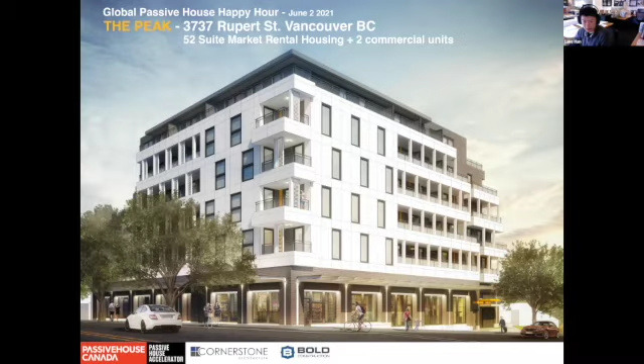So the Peak is a 6-story Passive House mixed-use building with retail and restaurant use on the first story and 52 rental dwelling units on the upper stories under the secure market rental policy. The site is located at the intersection between Rupert Street and East 22nd Avenue.

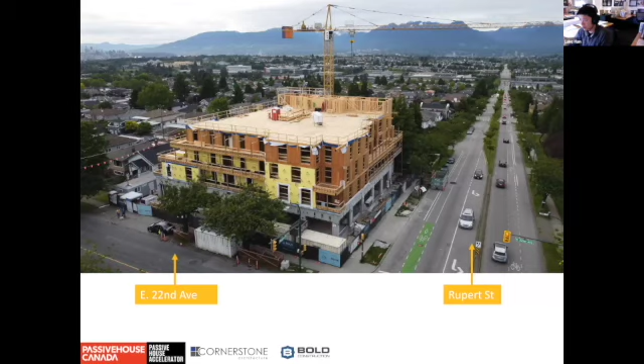This is the current construction progress so far. So you can see we're framing level 5, and you can see on the concrete floor we're already installing the storefront, which is vinyl windows, which we want to talk about later.

Right, so we will be focusing on the 5 themes, and both the design team and the construction team will have different issues to consider.

Starting from the compactness, the peak's surface area to volume ratio doesn't look too bad. It's within the favorable compactness ratio, and it's similar to two of our other passive house projects, the Heights and the Little Mountain co-housing.

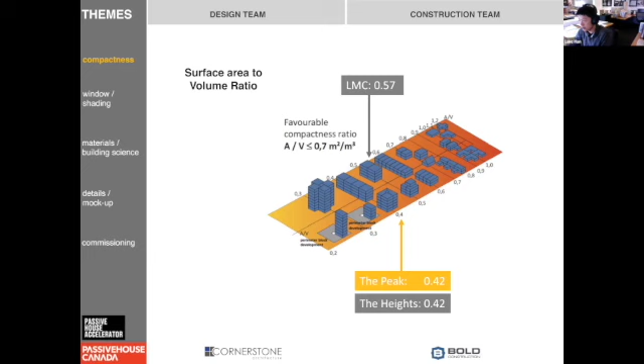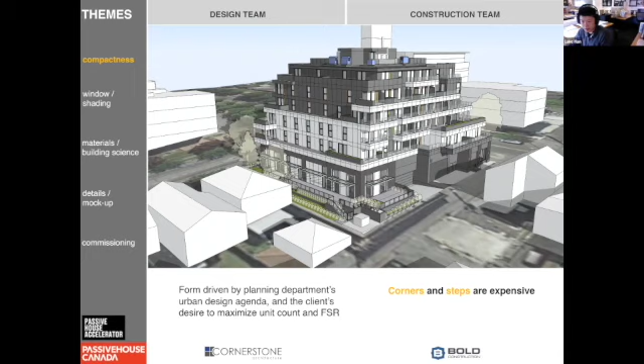However, the building massing is still stepped quite a bit. This is primarily driven by the planning department's urban design agenda and the client's desire to maximize unit count and FSR. The complicated site condition and sloping also adds complexity to the building form.

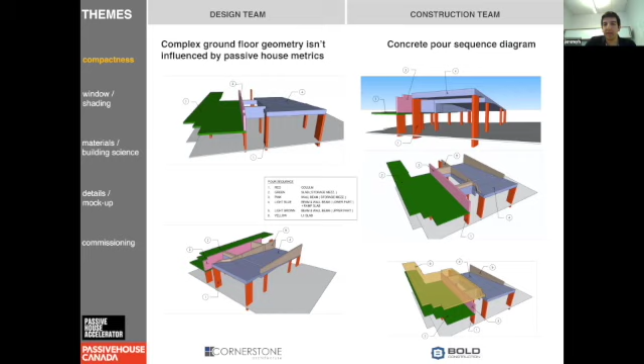This is a 3D representation that the structural consultant sent us. It was really interesting because it shows how the consultants are really involved in the project for this one.

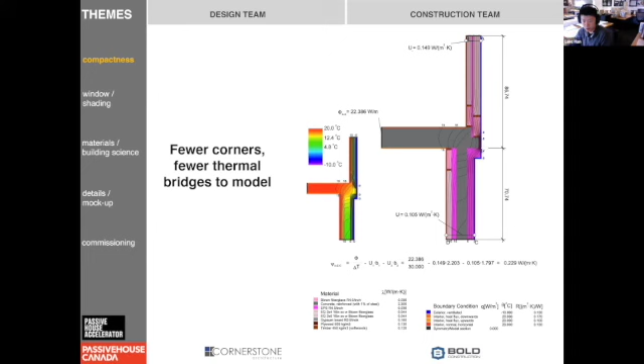From a modeling standpoint, fewer corners means fewer thermal bridges to model. This was our list of thermal bridge inputs in our PHPP model. Also, simplifying window types and reducing the number of mullions will help a lot as well.

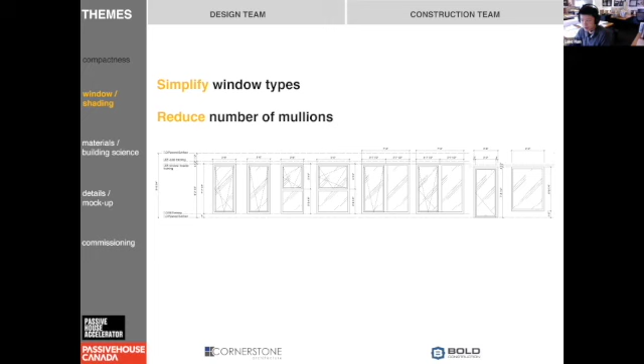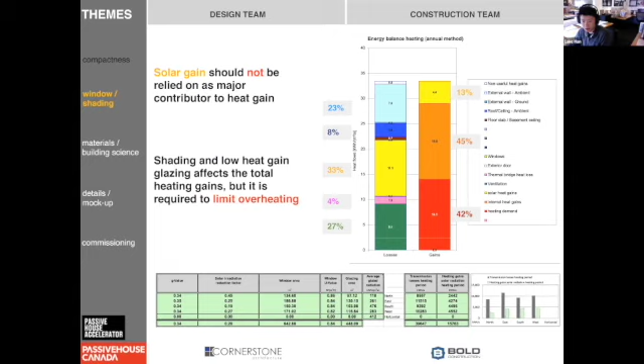What we found was that solar heat gain should not be relied on as a major contributor to heat gain. What we want to do is balance the solar heat gains and shading so the heating demand is as close to 15 kilowatt as possible. If the heating demand is too low, it means the building is likely to overheat; too high and you don't achieve passive house.

The windows are high performance Innotech windows and doors, and they are certified PHI components.

So we're using those Innotech windows for the storefront and the units, and those are really heavy, so it's hard to install. We decided to go with a professional installer, so Innotech is installing them too, instead of what we usually do, which is the framers.

Also, the cost on those windows is slightly higher due to the performance.

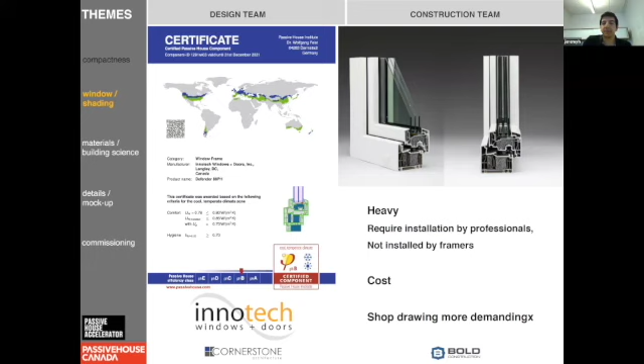The other thing is there are multiple methods to limit overheating. The passive method would be opening windows and using fixed shading or deep balconies. The active method would be operable shades with supply air cooling using heat pumps. There are also rough-ins for ceiling fans. Smart glass or self-tinting glass can be considered if required.

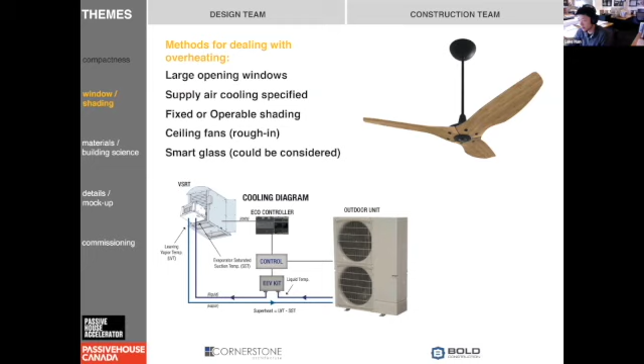Regarding shading, we originally decided to go with manual sliding shades since it's mechanically simpler and it's a passive system. However, as we discovered, the mounting details are more difficult to deal with from a building envelope standpoint, and also the amount shaded can vary greatly as it depends on the angle of the sun and relies on the occupant to manually move the shades.

We also had issues with supply because we didn't have many local suppliers. All the suppliers we found were from Europe, and the cost was therefore higher. With the COVID situation, we were a bit preoccupied with the delays that could generate.

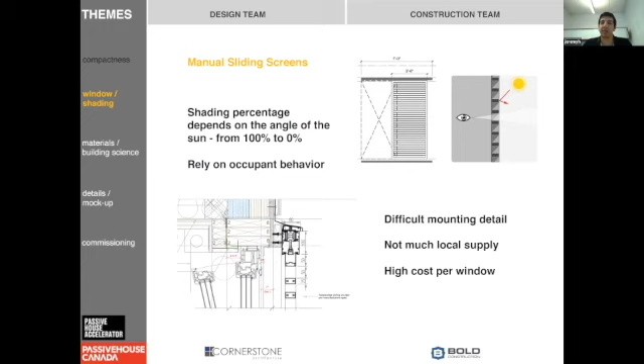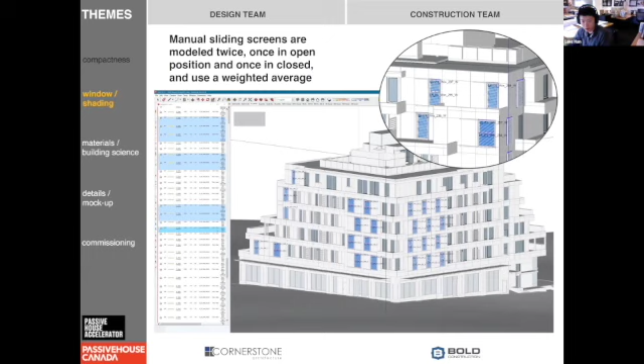When modeling these, we have to model the shades twice, and the weighted average is used. This all increases the variables in the model, which affects the accuracy.

So after a pricing exercise by Bold, we decided to go with the automated exterior blinds from MHZ. These provide a constant 92% shading throughout and allow for higher solar heat gain glass, and it's automated for better control. These are also solar powered with rechargeable batteries.

Also on the install side, they are easier to install, and we avoid all the detailing we had to do with the other shades. So there's no envelope issues with those.

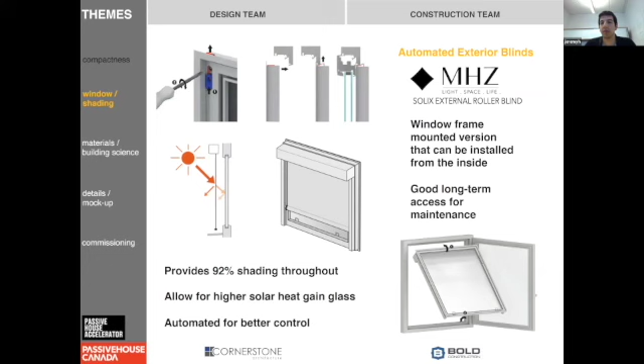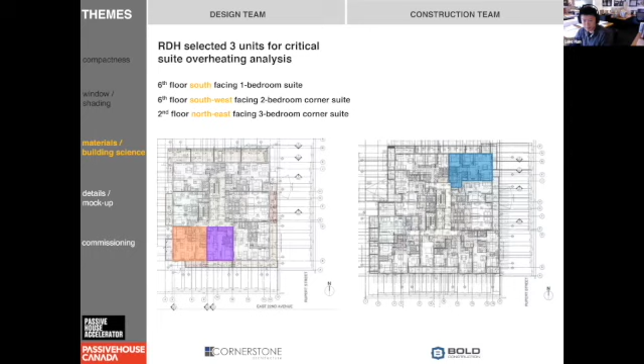We had RDH do a critical suite and overheating analysis on the building. The results were: under the current model, there are only 5 hours above the 80% acceptability limit, but with the 2050s model, overheating becomes more of an issue at around 602 hours. These were modeled with the exterior manual shades and partial mechanical cooling.

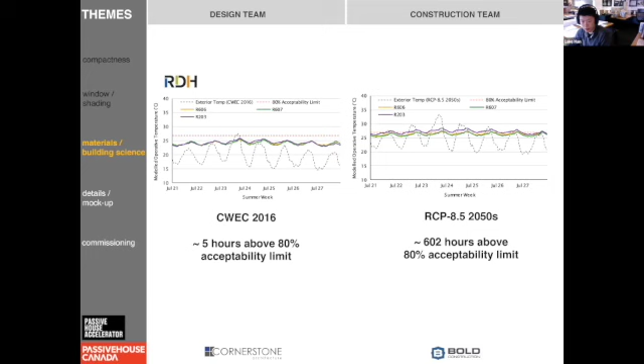Another important design challenge is detailing the continuity of the air barrier in section and in plan. Bo can speak a bit about the education of the trades.

This is the one we're working on right now because we're doing the framing, which is key for air tightness. We had a conference with E3 who helped us and the trades prepare for air tightness, for all the pre-stripping on the walls and the rim joist. That was really useful for everybody, and it was nice to see all the trades really involved in keeping the building airtight.

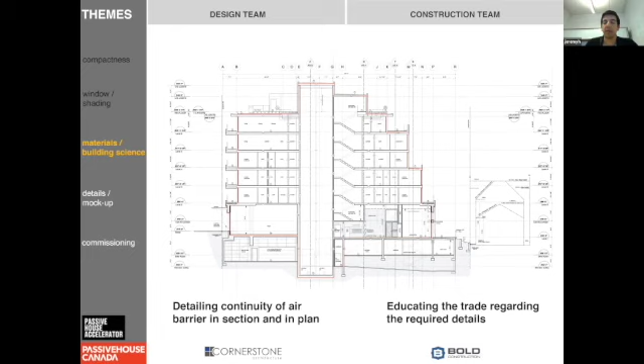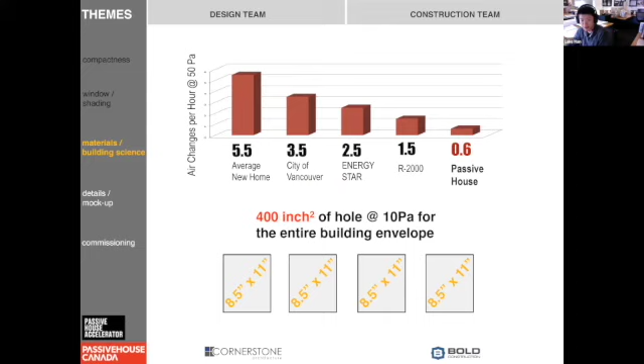Air tightness is pretty critical in meeting the 0.6 air changes per hour for Passive House. For visualization, that's 400 square inches of hole for the entire building envelope, equivalent to 4 letter-size pieces of paper. Here's a sequencing diagram of how the air barrier is installed at the floor lines.

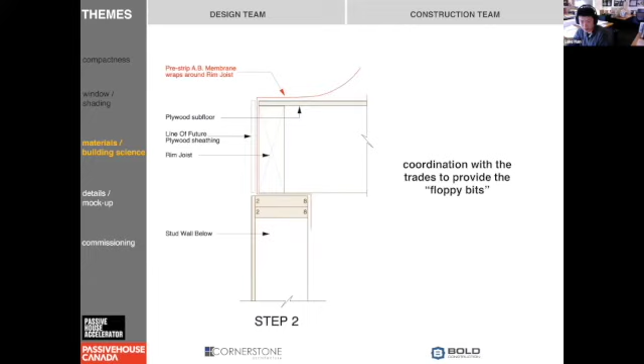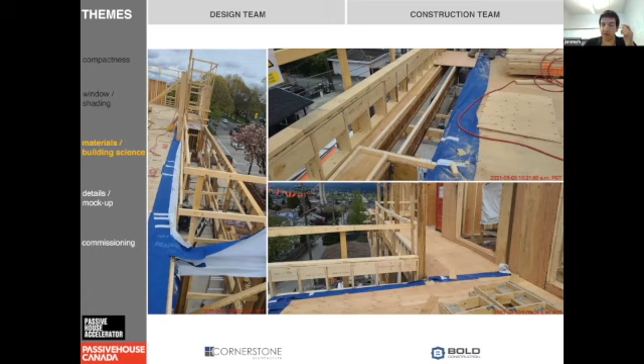The floppy piece of air barrier membrane is wrapped around the rim joist and connected to the wall above. Here's a construction image showing different details, some at the edge of the deck, some at the edge of the building, and transitions between outside and interior parts.

Smart membranes were used on this project to allow for more insulation in the roof cavity. This is because it allows drying to the interior.

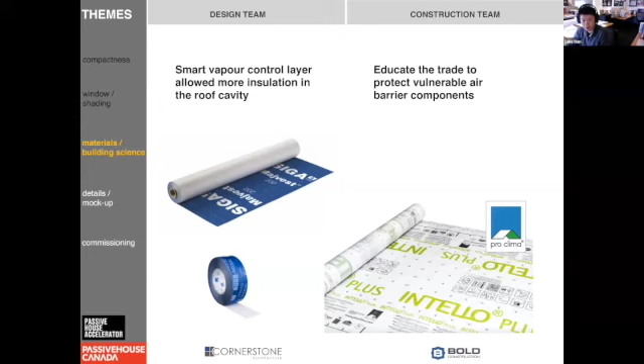Another consideration to control air leakage is with EPDM gaskets. Every penetration through the air barrier should have an EPDM gasket seal. We haven't done that on site yet because we're doing the framing right now, but we've already discussed it with Cornerstone and the consultants. That's an example from another project, from Luke I think.

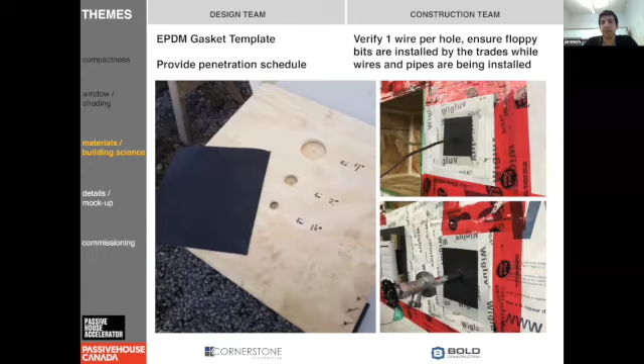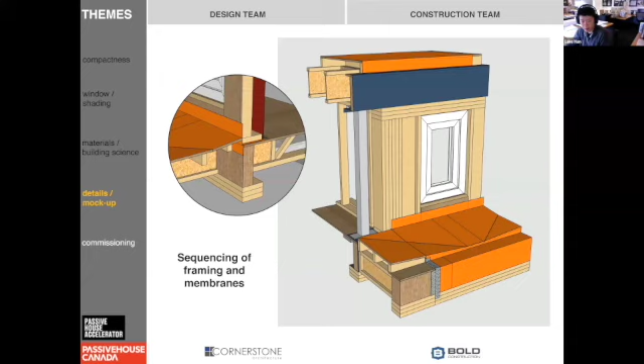Due to the complexity of the details, we've developed a 3D model to visualize all the components. This shows the membrane pre-stripping and taping required at the different interfaces: the overhang and rainwater leader, the cladding and curb, and the interior layers.

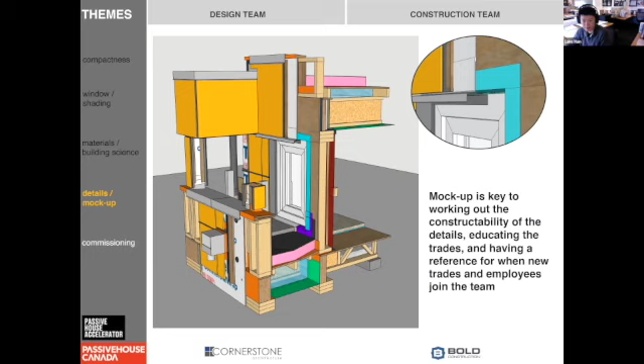We found the mock-up was really helpful for both the design team and the construction team. This is the current mock-up on site—right now we're working on the decks there.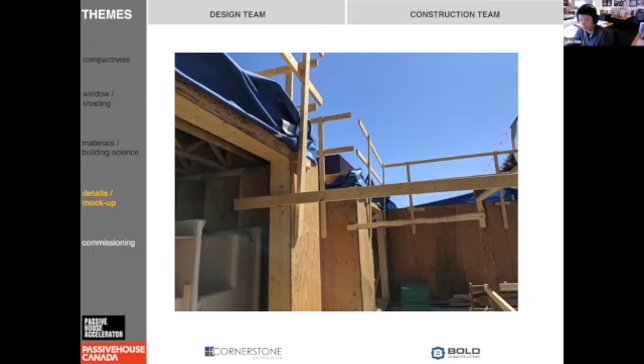Our main exterior wall assembly achieved an R value of 31. There's the roof assembly, which shows the smart membrane in green at the underside of the joist, which allows the cavity to be filled with blow-in fiberglass insulation.

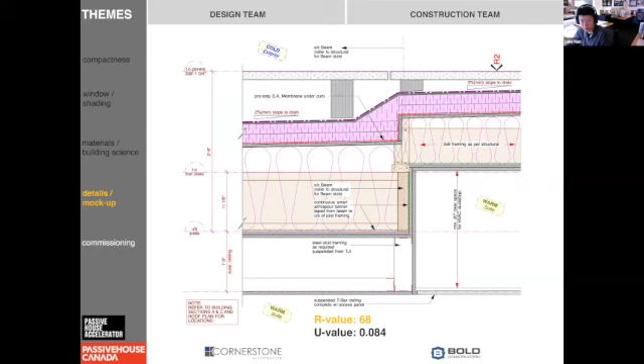Our roof has a stepped structure to fit the ventilation ducts and the DX coils in the ceiling of the space.

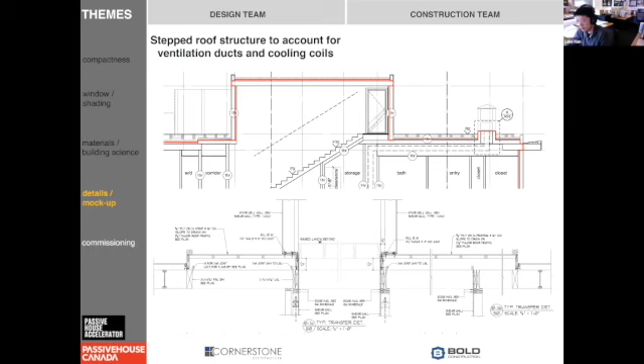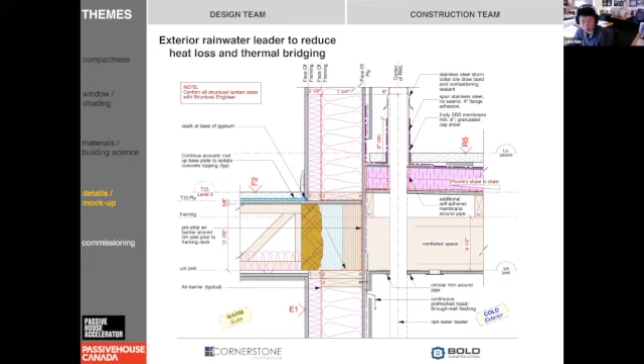Another design decision was to move the rainwater leader from inside the building to the exterior to reduce heat loss. The challenge was to keep it away from the walls for waterproofing, and to come up with a way to slot it through the balcony.

Our mechanical contractor, Omega, provided a solution to drop a single continuous stainless steel pipe through the balconies. At every level there will be membranes and storm collars for waterproofing. They provided a shop drawing last week, so we're working on it right now with Luke.

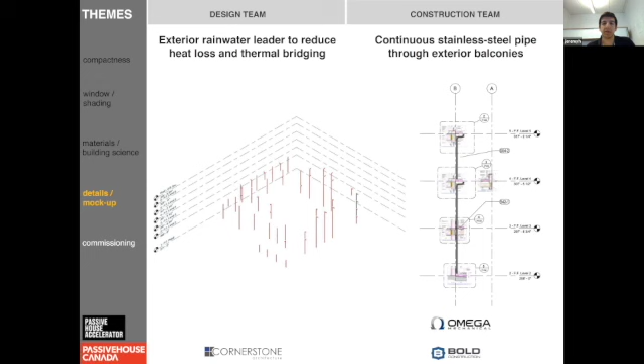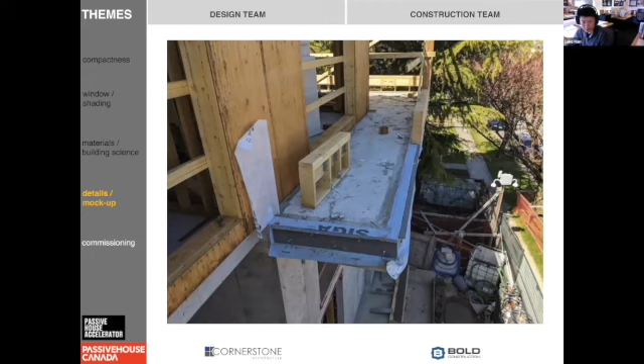This is showing the deck transitions. This one shows the concrete detail and the inverted roof design at the concrete level. This is a current progress photo at the slab edge.

This is a window curb detail at the concrete level. This is the interior side, where the wood furring is kept off the concrete with thermal clips to reduce thermal bridging.

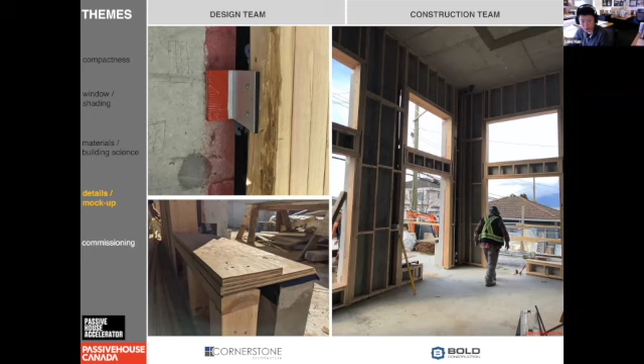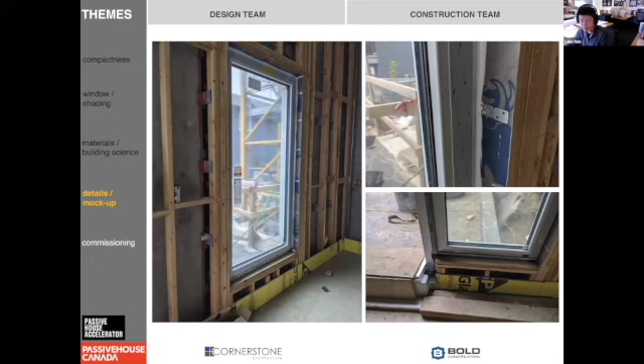This is showing window curb waterproofing at the concrete level, and this is the window install detail. We have the window already installed and we're ready for testing soon.

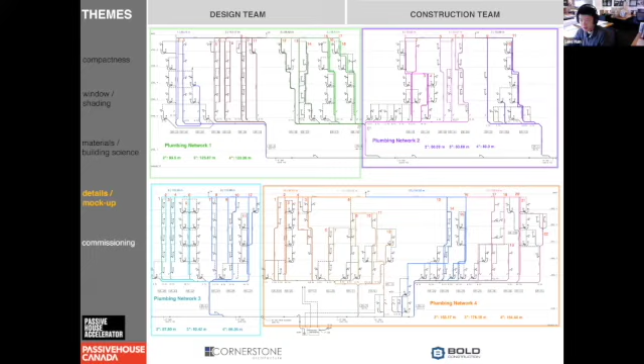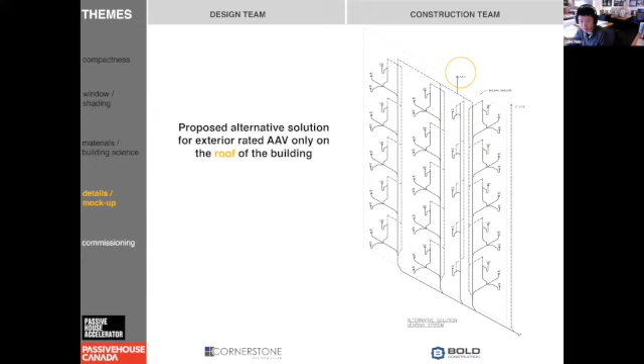Another big heat loss element is the plumbing vents. One way to resolve that is with the use of AAVs and PAPAs. Currently there's an alternative solution to use exterior-rated AAVs only on the roof of the building, and that's been accepted by the City of Vancouver. The ideal way is to remove all the other venting or other branches.

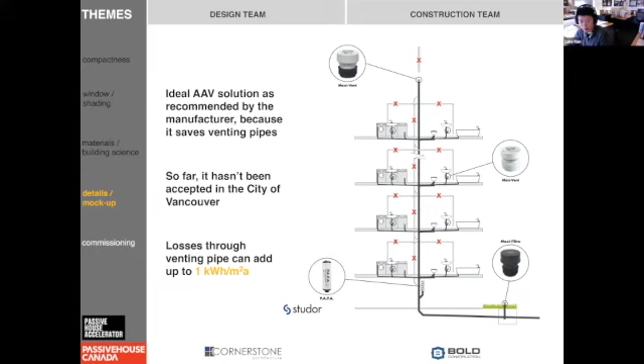Blower door test for air tightness will be one of the key elements at the commissioning stage. On the 6th floor, we're doing a kind of mock-up for the whole building to find the leaky points on one unit. So what we've done is we've isolated one suite, taping the floor and doing special preparation around it so we have one good sample to test our exterior wall, parapet, and roof assemblies to see how we're doing.

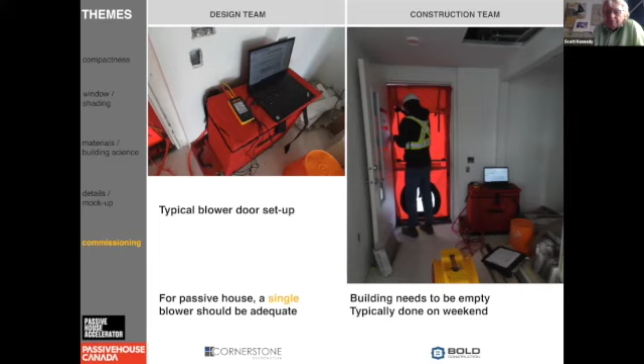All the ducts will have to be sealed. For a full building test, holes will need to be left in the wall if there's no common corridor, but in our case, we do have a common corridor.

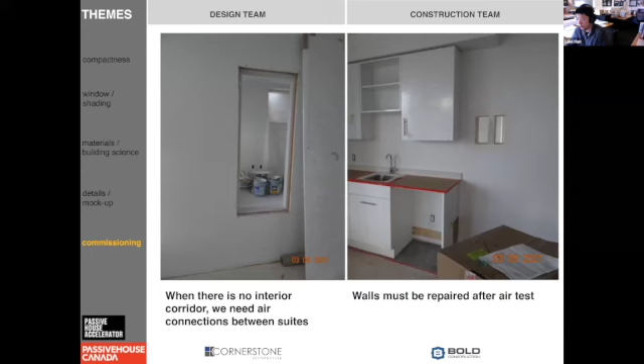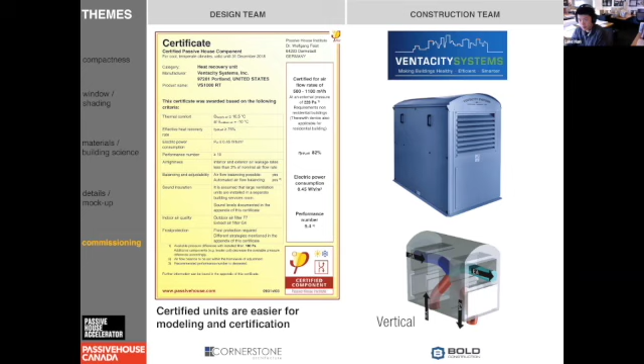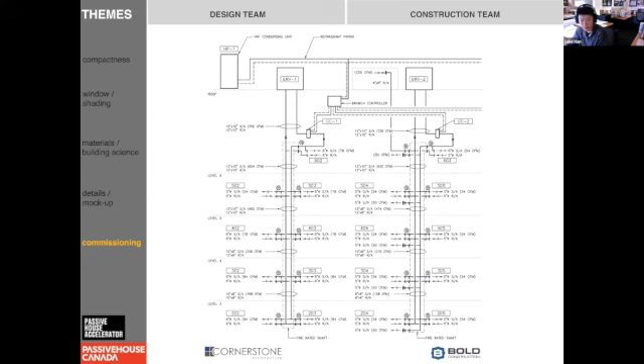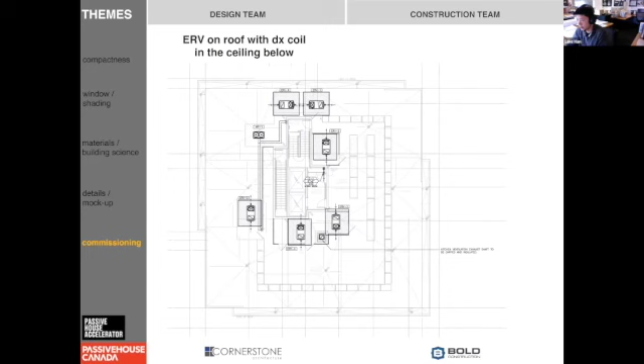Another important item is the HRVs or ERVs. One stack typically serves around 9 suites, with 2 suites per floor, and there's one heat pump on the roof to temper the supply air with some cooling and heating, controlled by the ERV. This is a typical floor showing the suites served by each ERV stack. The ERVs are located on the roof with the DX coil in the ceiling below, and by zoning the suites into stacks, it allows for similar temperature conditions per stack based on the sun's position, to control the temperature of the air being supplied.

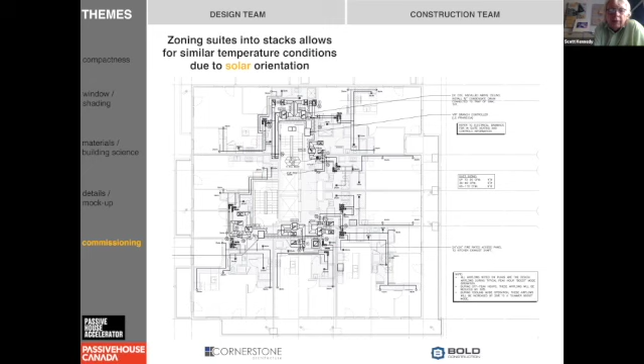One of the keys on that floor is we wanted to put the cooling coil and heating coil within the thermal envelope. So we've elected to come through the roof out into the corridor where we can service that coil, then back down into this vertical stack of the suites for the supply side. The system also allows for different temperature set points.

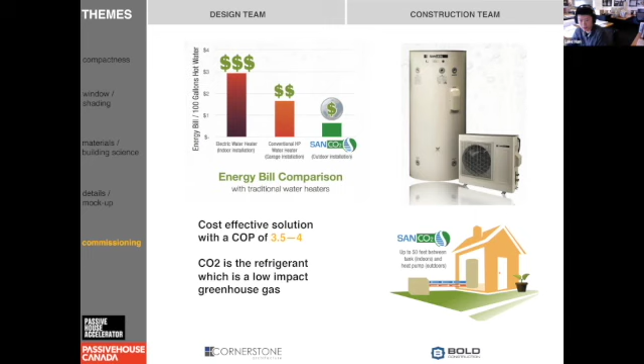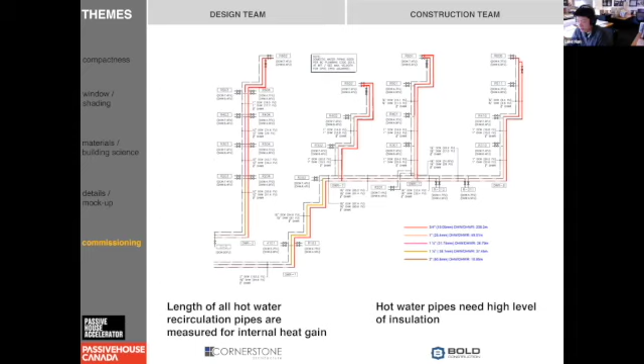For hot water generation, we're using the Sanden CO2 heat pump because it's more cost effective compared to conventional water heaters. For this project, we're using 4 Sanden units linked in series to provide all the hot water required. All the hot water pipes are measured to provide a more accurate model of the internal heat gains. And yeah, that's it.

Excellent. Scott or Paul, is there anything else you guys wanted to add before we dive into questions?

What we can talk about is that we did start early with wall construction, discussing exterior insulation versus interior insulation versus how the wall system was going to work. At the time, the choice of wall that was made was 2x8 framing with a 2x3 service cavity wall. Quite honestly, I was thinking that the 2x3 would just be held up and nailed - you can nail a 4-inch nail through a 2x3 and get it cross-strapped.

There was a decision to actually pre-frame those walls. They're laid loose inside the building, but the studs are offset, staggered, and there's a horizontal block added during the pre-framing, so there's something to anchor them to, because the 2x3 is a little flimsy going 9 feet. So those are some of the decisions that got made as we went.

One of the key pieces we found on a lot of these buildings is trying to get your airtight membrane in concert with your deck waterproofing, because they burn it off all the time with the torch, and then you've got a problem. So we're now trying to protect it with plywood - rather than having the joist right out flush to the plywood, we bring it in a half inch so we can bring the plywood down over that and protect that membrane after it's on to get the air tightness, and then the torch isn't going to burn it off. A lot of little lessons like that you just find out when you get on site and realize you have a problem.

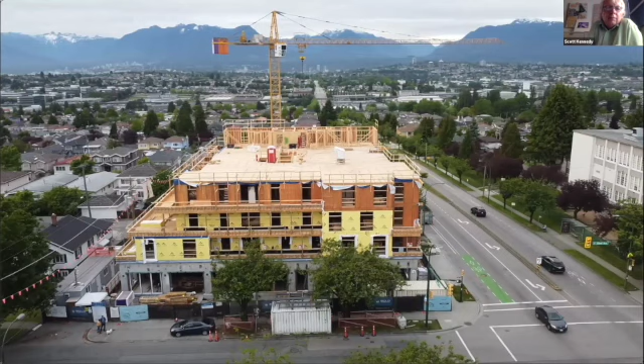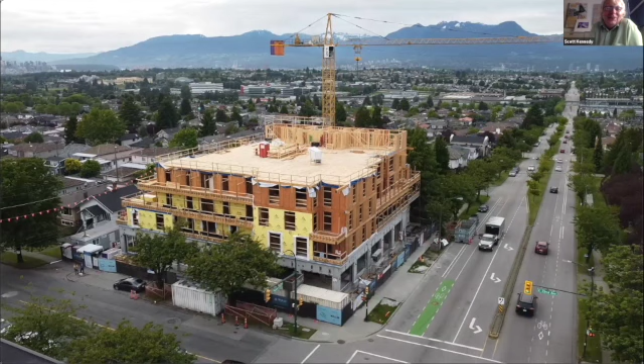As you can see, this is in beautiful Vancouver with gorgeous mountains to the north, but the city made us blank the windows to the north, actually put obscure glass in them because they didn't want us to look over the neighboring yard. Kind of ironical, considering that yard will be turned into another building this size in a few years' time. I know, but that's what we deal with.

There's always a lot of discussion about the commercial space, and is the commercial certified or not? We do know that one of the tenants in the commercial is going to be a restaurant, and I tried my darndest to get them to go to induction cooking, and maybe even if it wasn't quite a certified kitchen, at least a green kitchen. I just had no success at all, I just couldn't get there. Part of it's cultural, right? It's an Asian restaurant where they're so used to wok cooking and all of that kind of stuff, and it's hard to get them over the line. So it will be a passive house envelope in that all the envelope pieces are passive house, so in the future, whatever goes in there could technically be certified. But at the moment, we're going to certify the whole building, and we treat the ground floor as if it's office and use those heat gains for office, and that's part of the certification process.

Excellent, Scott. Thanks for clarifying.

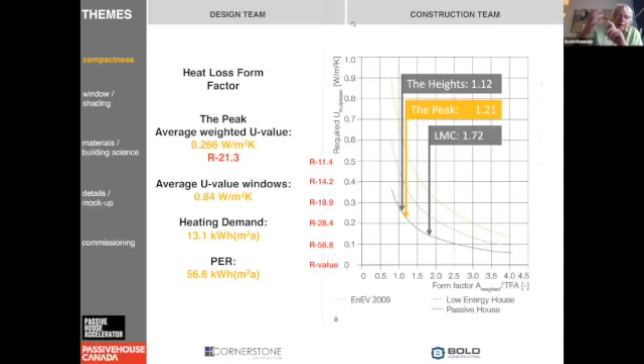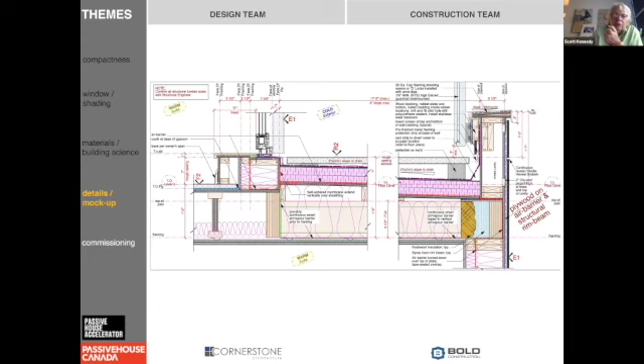Luke might be able to get to a section, but we typically insulate on top of the slab. It's difficult because you've got two different elevations of slab - the main floor slab over the parkade, and the second floor slab over the loading dock and some other pieces. So it's a combination of insulating below and insulating on top. Sometimes you just account for point thermal bridges where the columns go through, or sometimes we insulate down the columns a couple feet to improve it - we're having those discussions on a couple buildings we're doing right now. But you see this one's a split insulated floor, insulated on top and insulated below, and that helps us deal with thermal bridges and other things.

Yeah. Okay, cool. Thanks.

Yeah, and you've done that detail on a few. Yeah, I've heard the big towers in Vancouver - a lot of them are taking the main floor, that bottom floor, out of the thermal envelope. So it's passive house from the second floor up, but not the main floor. I've heard that from a couple of people working on it.

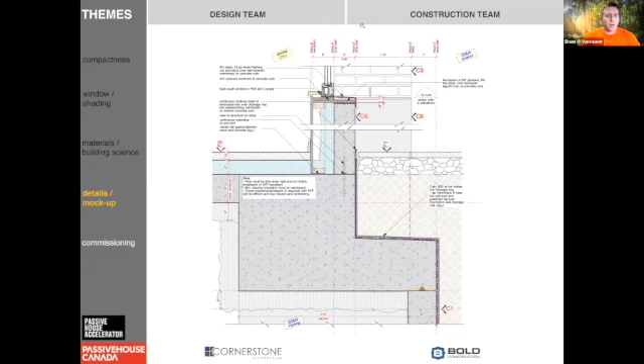All right, thanks, Vincent. I thought we could go back to that comment, Paul, about the integrated design process and when you guys were brought in. Have you reached out to architects and developers to see how you could be engaged sooner, maybe for a fee before you're hired on as the builder, just to be involved earlier in these discussions to provide some insight from your experience?

Absolutely. We offer pre-construction services to just about every client that comes in, if we catch it - there's no point doing pre-construction if they've already got a baked-in building permit. But if we can come in before the issue for tender drawings and help shape some of the design decisions, typically we have a proposal that involves an upset fee for the pre-construction phase, which has its own budget for any costs incurred other than just management fees. We put a time frame on it, usually 6 to 12 months, and bill it out continuously until we use it up. We also very often offer a discount to the client of up to 50% of the pre-construction fee if we're successful in closing a construction management or fixed price contract with them at the end of the process. So that's how we do it.